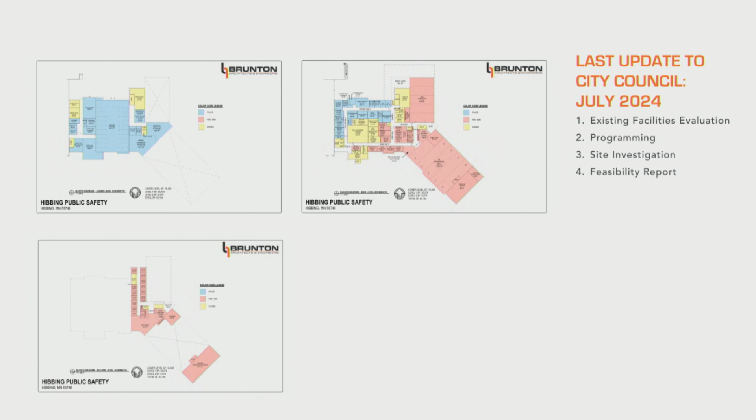And we produced a feasibility study report comprising of all of that information. So you see on the screen here, we got to the level of block diagramming stage when it came to space planning and allocation, and this is in reference to the Public Works property.

Since that time, we've had a successful referendum vote in November. We've developed engineering narratives for all of the engineering disciplines for a public safety facility project: structural, civil, mechanical, and electrical engineering. We've onboarded commissioning agents as required by the Department of Administration, required for the funding that's been allocated to this project from the state of Minnesota. Progressed their required submittals for the Department of Administration and B3 process as well.

And then we've completed schematic design for an addition, public safety addition to the Public Works facility that we'll be reviewing here today. So the schematic design that we've developed since those block diagrams that you saw earlier includes a 3-story facility that is an addition onto the east side of the Public Works facility.

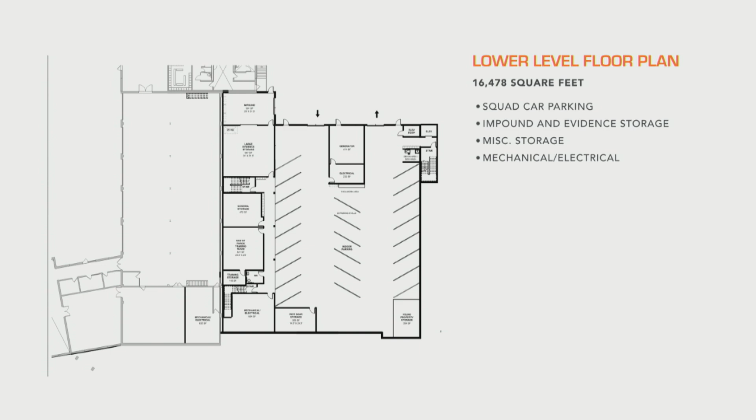The lower level of that facility is about 16,000 square feet, would be comprised of squad car parking enclosed underground, impound and evidence storage for the police department, and miscellaneous storage and mechanical and electrical support spaces to serve not only the addition, but the existing Public Works facility.

The first level floor plan includes just under 40,000 square feet, and our design goals are to minimize the footprint as much as possible and make this a compact and efficient building.

But the first floor is pretty essential to a lot of different spaces, including having a public entry for the community, multi-purpose and training room shared by both departments, fire and police administrative office spaces, both wanted to be on the main level and accessible to anyone from the public coming into the facility, additional evidence storage, police locker rooms, a shared fitness room, a sally port and holding space for the police department, ambulance and apparatus space for the fire department are on this level, along with fire command vehicle bays, a hose and training tower, and associated fire decontamination and support spaces for those vehicle bays.

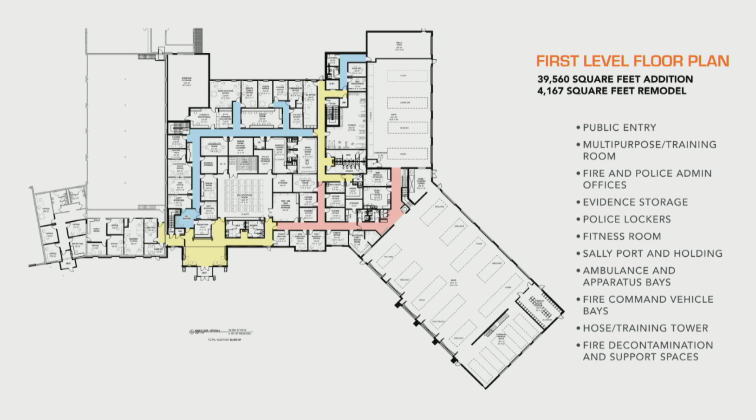As you see on this plan here, the blue on the plan shows police-only corridor spaces, so access control would be implemented throughout the plan. Red indicates fire-only space within the facility, and the yellow are combined or public spaces that are shared.

And then the second level is primarily for the fire department, just under 6,400 square feet, comprised of fire bunk rooms, day room, locker rooms, and that hose training tower, as well as a mezzanine for additional storage and potentially training.

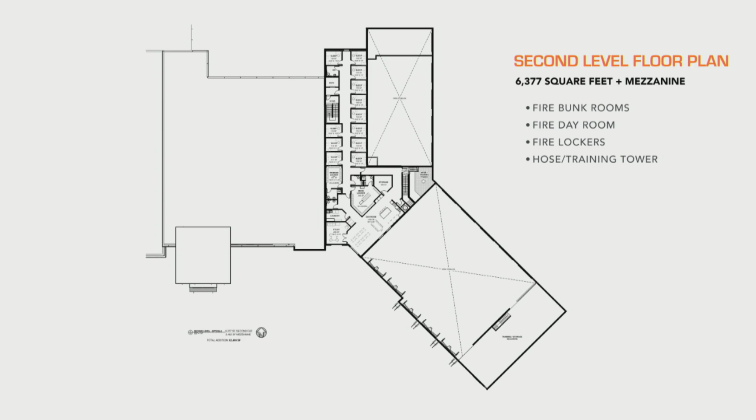The goal of the building is to construct it out of architectural precast concrete, very durable, low labor requirements, all prefabricated, and longevity of the foremost thought there, in addition to steel-framed roofing.

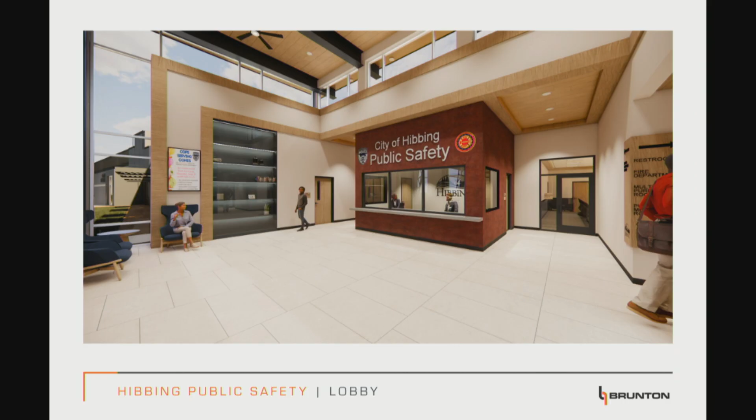And then just today, we had a design meeting with the building committee and developed some interior renderings. Want to bring the exterior of the design into the lobby, want to provide a warm and inviting space for the public to come in, referencing Hibbing's industry and history, and still make it just a welcoming space to bring in the public. You can go to the reception desk and get access to either department on either side of that space, or have somebody from either department come up to greet you.

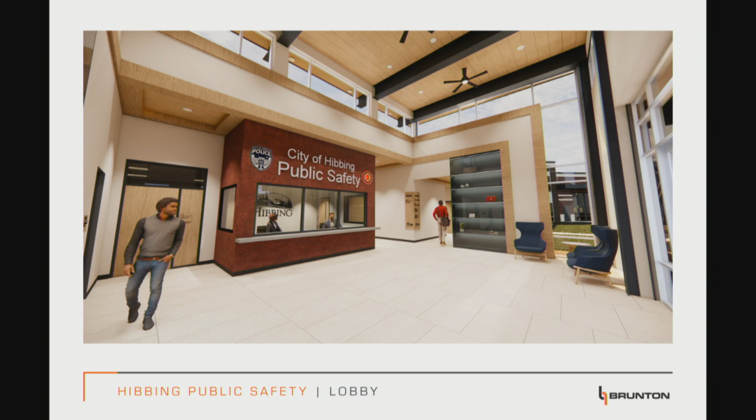And a few more images of that space as well. There's room for displaying memorabilia for both departments in that lobby on either side there. Here's looking out to the entry.

The shared multi-purpose space, again, trying to maximize as much as we can within the square footage we have, could be shared by both departments, and both have their own individual storage spaces off of this room. It can be configured in multiple ways, has ample IT and technology support.

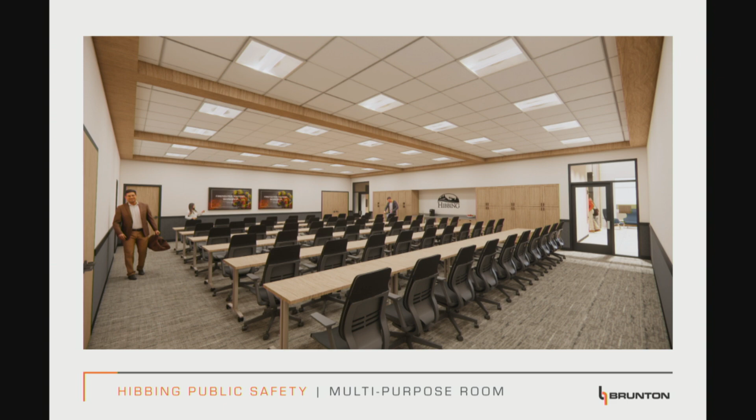And then if we do decide to use this facility as an emergency operations center, it can accommodate all configurations of seating, up to 60 seats within the space, down to 32 seats in a bullseye configuration.

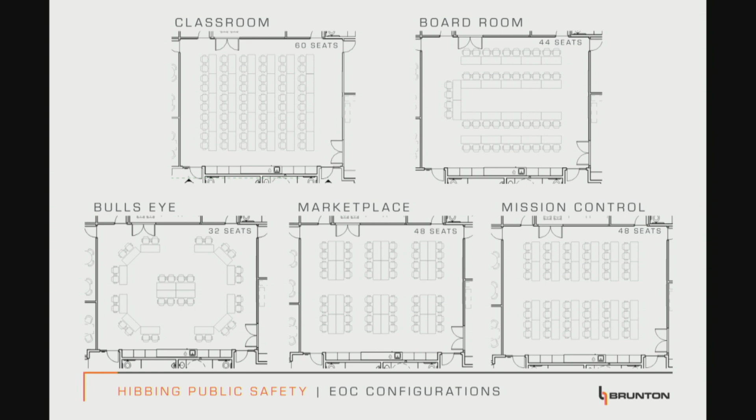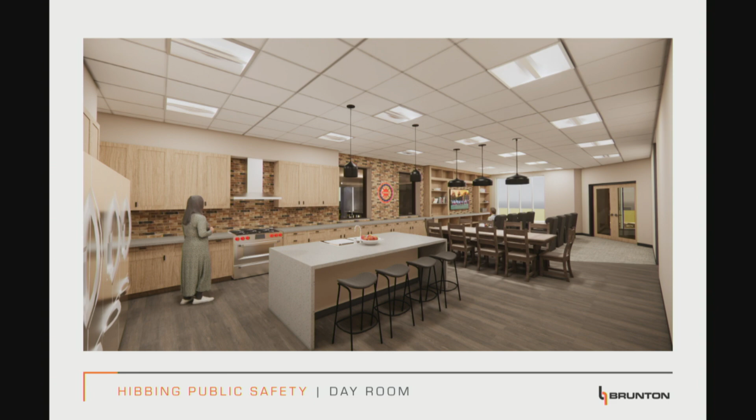Preliminary design still at this stage. We're still receiving feedback on all those materials, and it will keep evolving as we continue through the design process.

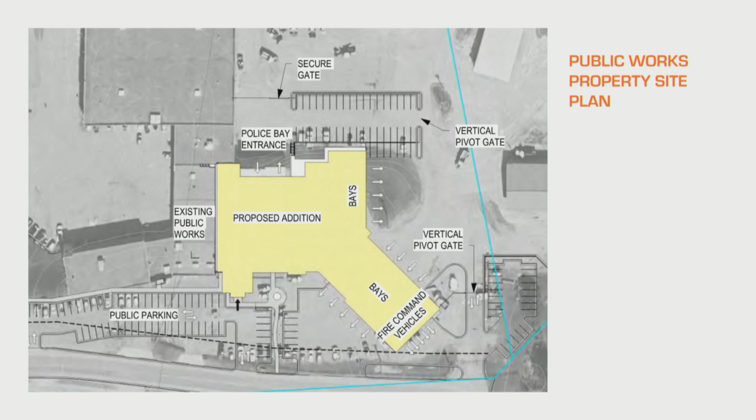Big piece of the work that we've been doing over the last several months has been digging deeper into the Public Works building and the site. So some of the work we've completed lately to do our due diligence on that site was completed a site survey, locating the grades and utilities on the property.

We've completed a structural engineer's evaluation of the existing roof. We've engaged a geotechnical engineer to do soil borings. The last soil borings were done with the '96 addition, but we are expanding on those and confirming what was completed when they put that addition on. And they mobilized here yesterday and today, so that's just getting started.

We've engaged a hazardous material investigation firm that will be starting their evaluation here in the next several weeks. And then we've determined a deferred maintenance outline for the existing building.

With that deferred maintenance evaluation that we conducted between architectural and engineering disciplines, we've determined several updates that would be required for the Public Works building in order to put the addition on. Some of these would have been needed regardless of the addition at some point. One of those is to relocate the existing mechanical and electrical equipment.

The portion we are proposing to demolish on the St. Louis County building includes the mechanical and electrical rooms. So in order to maintain operations for the city, Public Works, and MnDOT departments, we would need to create a new mechanical space for those to continue. We would need to relocate their bulk oil storage and compressor into the part that is to remain, and reconfigure a little bit of space within that existing building.

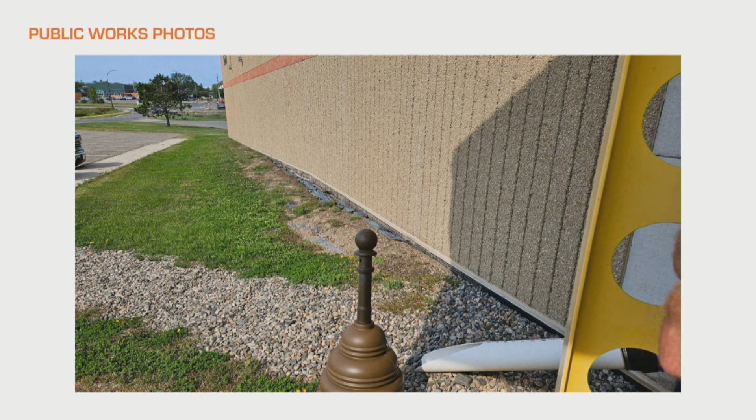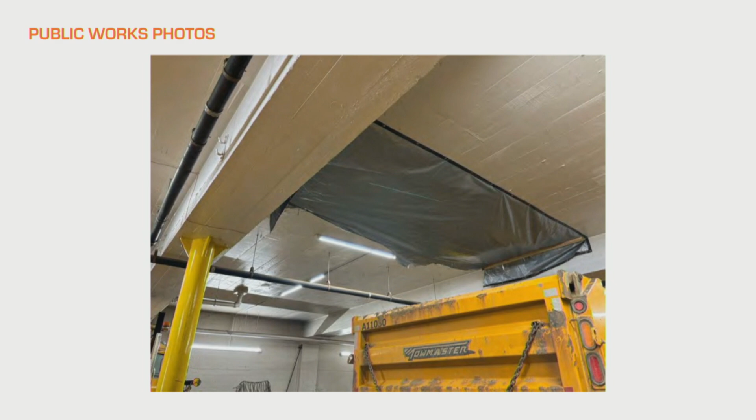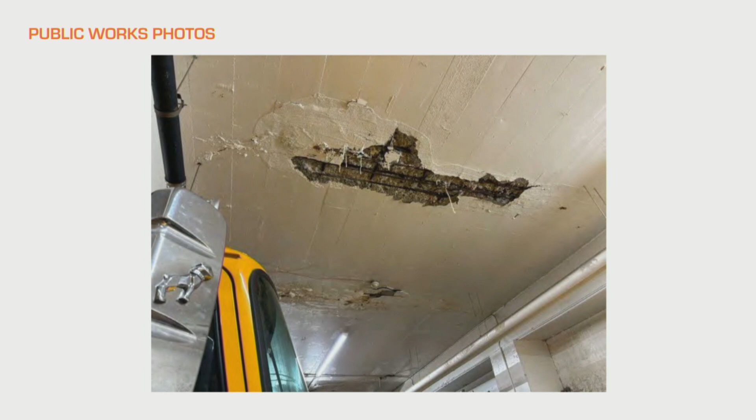And so the building committee and the design team have all concluded that there is, despite these findings, great value to this property and this site. It is highly visible to the community, which is a huge benefit when looking at your first responding team having access to the public, to those resources, and it consolidates all three of those city operations to one location.

Response times and access to the belt line there would be ideal for both fire and police. You have the ability to secure the site—most of the site is currently fenced, and we would modify that slightly to accommodate the addition. And you have the ability to expand as well, which is currently limited for both departments.

And so I'll ask Greg to come back up and talk a little bit about where we are at with the acquisition side of this location.

Before I do that, I'm going to springboard off what Ginny was talking about regarding the value of the site. Visibility was a high priority for us, staff and city council. I think our residents, if you took a survey, would say visibility of this new facility is very important to them. We're also trying to consolidate our operations—remember, we've got our fire department in one location, Stunts Garage, and some other facilities. So we think it's a top priority to concentrate those operations. Response times are also very important, remember we did some heat mapping a year or two ago, to be able to respond to emergencies, fires, ambulance responses, et cetera.

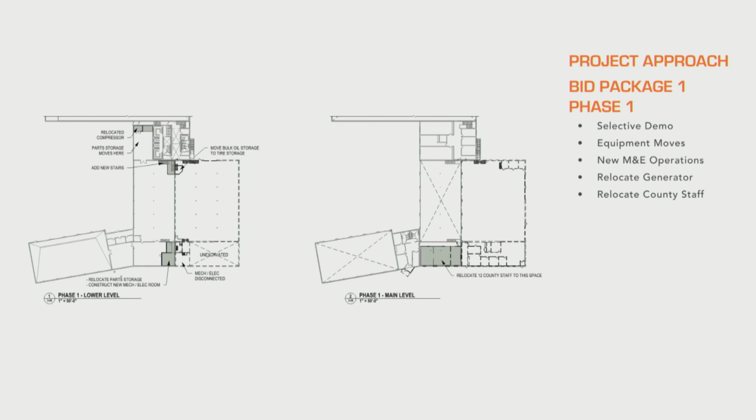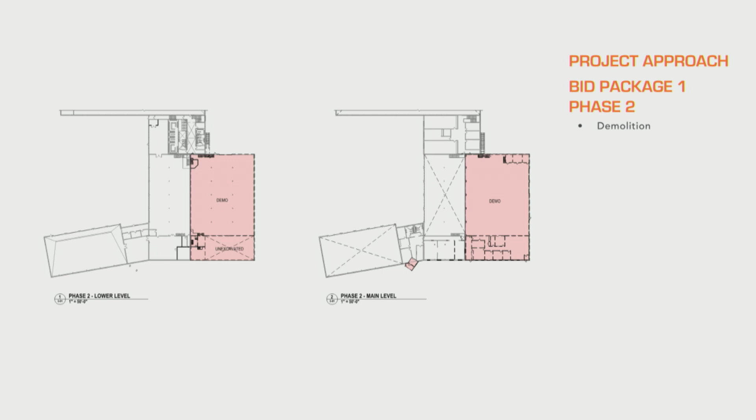So that's phase 1. Phase 2 would then be the demolition of the existing portion that's going to be removed. That would be a very surgical removal from the building, as it's attached to the existing portion of the public works that will remain. So very strategic demolition for phase 2.

And then phase 3 is the big portion. That is the addition where the building demolition would be complete. We do excavation of the lower level, set up a soil retention system, and then begin construction of the addition to the project. So that's phase 3.

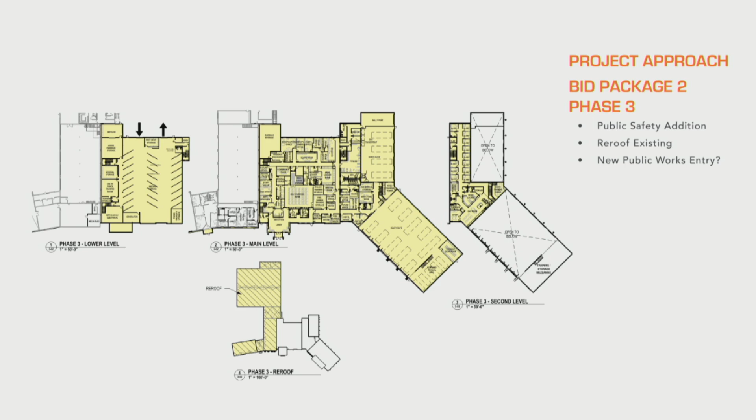With that, some of the deferred maintenance items, if those chose to move forward, would be progressing at the same time as phase 3. Phase 4 is this area here, the existing building that's got some renovations planned, remodeled areas to accommodate some of the staff remaining in that building from the county. Phase 4 could be under construction at the same time as phase 3. We're just keeping this as phase 4 to keep it separated out.

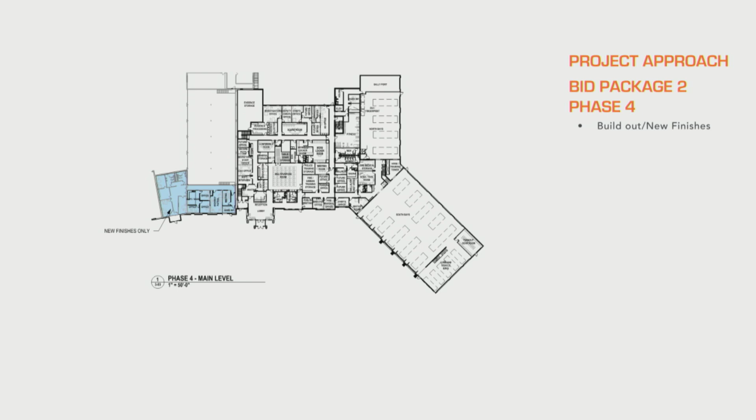So we've pulled together segregated budgets. We have the main addition as one number - that's the numbers you see in front of you on page 1, which is just the summary page of the estimate that we prepared. And then we've got bid pack 1, phase 1 separated out, which would cut free the existing building that's going to be demoed. And then we've got the deferred maintenance, and a general list of soft cost items associated with the construction of the new building and also the deferred maintenance.

So the first summary page you have is the addition itself. Keep in mind that we have a design contingency and a construction contingency included in that number. That number is just above 29 million. I know it's kind of hard to see on the screen, that's why we handed out the full pages so you can see those numbers. So we're just above $29 million for the addition of the new public safety building.

And then the next one is the phase 1 work, again the cutting free of the existing portion that's going to be demoed. We're at about $890,000, again carrying design and construction contingencies on those as well. And then the next number is the deferred maintenance - those are the updates that are urgent, items that need to be addressed probably sooner than later. We've got a price tag on that of just above $3.4 million, again with design and construction contingencies included.

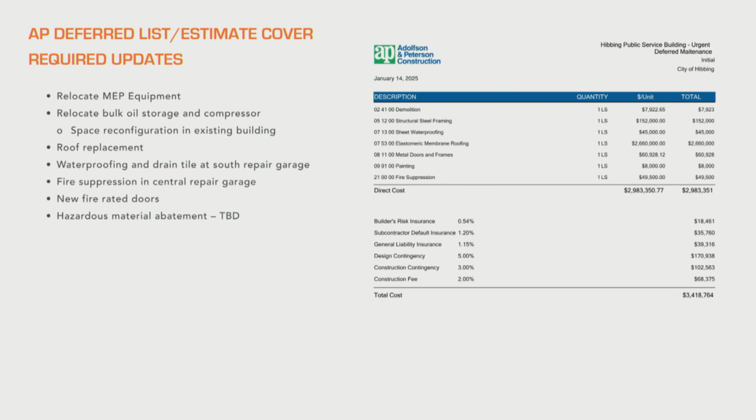And then we've got the second list of deferred maintenance, which again is some of the other items that Jeannie mentioned - items that probably aren't as urgent, but should be addressed at some point, at just above $1.6 million.

And again, Pat, could I ask a question? As long as all the deferred maintenance is on the existing buildings, of course - what's the cost savings by doing this at the same time? I mean, our original building is going to cost, you just projected about 29 million. Is there a cost savings for combining this and having it all done at the same time, because your contractors are on site versus phasing that additional repair work or refurbishing of the existing? Yep, that's actually another slide that's coming up here, but I'll go ahead and answer - yes, there is savings to the project to do them at the same time, yes.

Very good. We say in the construction industry, construction was never as cheap as it was yesterday. It's going to continue to get more expensive. We're going to continue to see escalation. It's going to continue. So yes.

Very good. The next slide here is just a list of soft costs that we've associated and put numbers to, for each of the addition and phase one, as well as the deferred maintenance. So from a summary level, we're talking project costs. We've got the public safety addition with the addition total at just above 29 million, and again phase one at 890, and then we've got the required updates at 3.5 million. Again there's contingencies included, just above $3 million on that work, on the public safety addition.